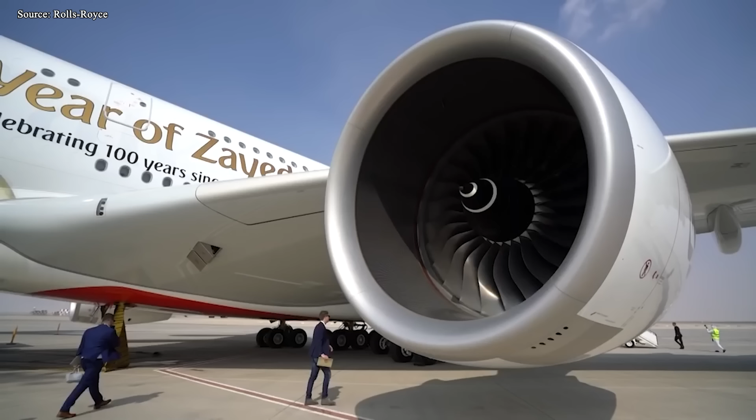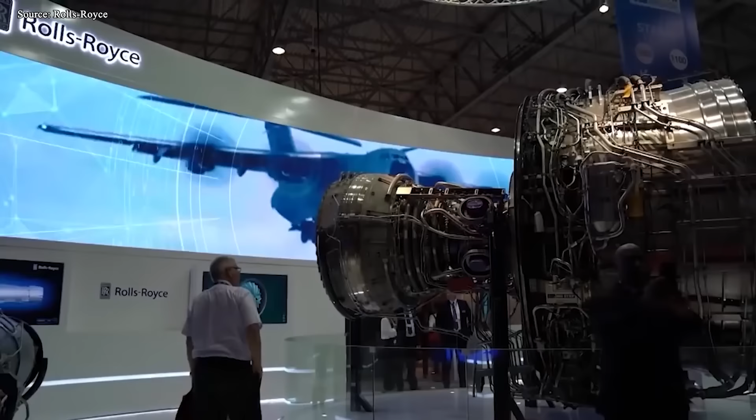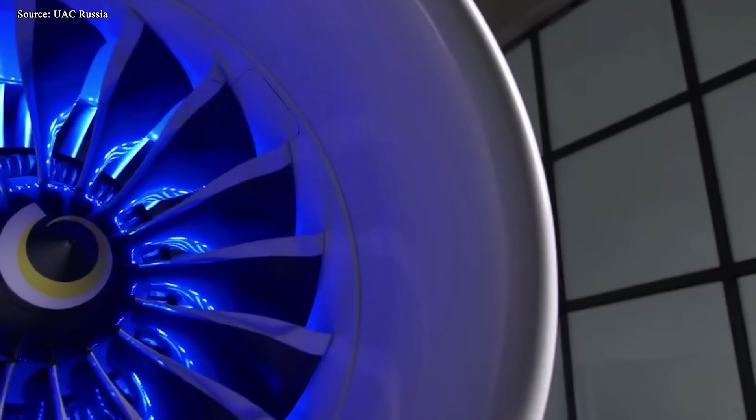In aviation, the engine isn't just another subsystem. It's the single biggest bottleneck that decides whether an aircraft flies, when it enters service, and if it ever gets certified. After Western sanctions cut Russia off from GE, Rolls-Royce, and Safran, engine dependence became a strategic vulnerability. In that context, PD-35 isn't just a new engine. It's a platform meant to unlock wide-body aviation at home. So why does it matter so much?

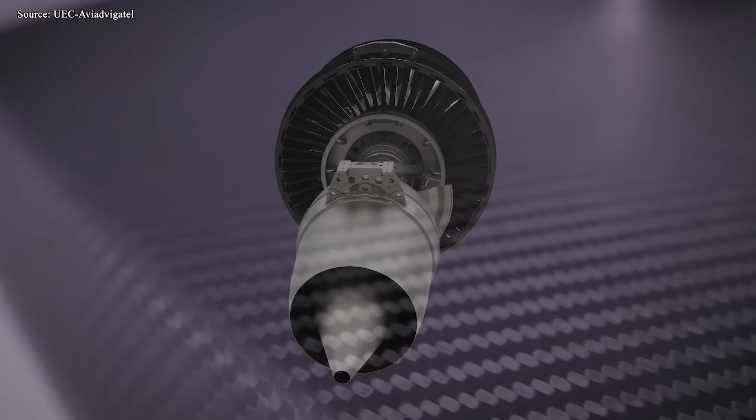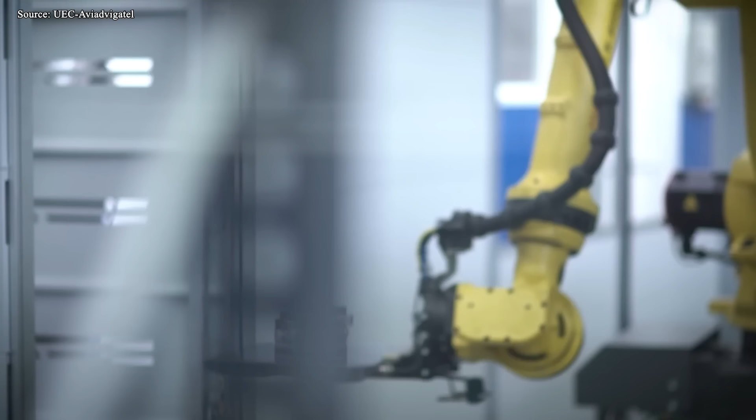And how could an engine platform reshape Russia's aviation future? Let's discover. If you want to understand PD-35, the first thing you have to forget is the idea of an engine as a one-off product. It was never meant to be a standalone power plant built for a single airplane.

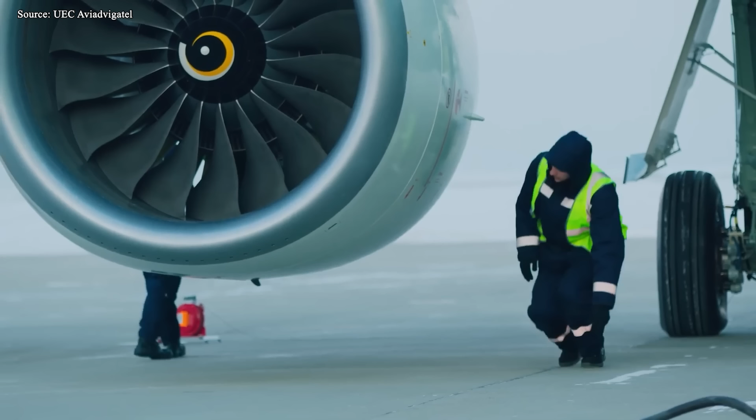It was conceived as a technology platform, and that distinction changes everything. The program is led by United Engine Corporation, and its roots go directly back to PD-14, the engine developed for the MC-21. That matters because this engine is not a clean-sheet fantasy or a political announcement disguised as engineering. It is an expansion of a core that already exists, already runs, and has already forced Russia to solve real problems in materials, cooling, and digital control.

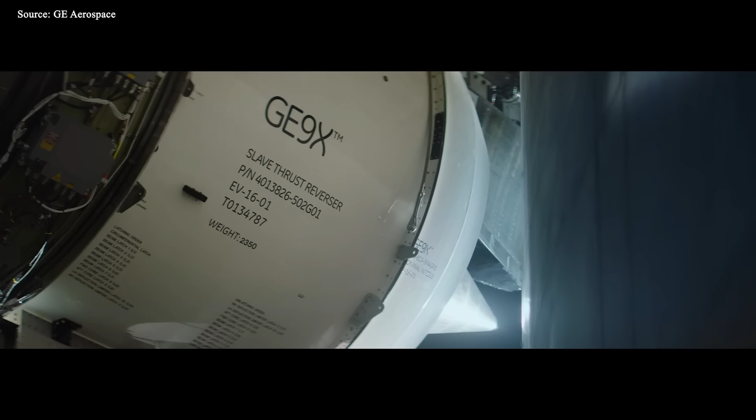This is how serious engine families are built in the real world. In commercial aviation, no country sustains wide-body aircraft programs by designing a new engine every time. GE didn't reinvent itself for each airplane. The GE90 led to GEnx, which informed later derivatives. Rolls-Royce didn't build isolated engines either. The Trent family is a modular ecosystem scaled, tuned, and adapted across decades.

That's the industry logic PD-35 is following. The goal isn't to win on headline performance. The goal is to establish a reusable high-thrust core that can support multiple wide-body aircraft over a long industrial timeline. This is why the engine exists at all. Without a domestic engine platform in the 30 to 35-ton thrust class, wide-body aviation simply cannot exist as a sovereign capability. You can design airframes, you can build wings, you can even assemble prototypes. But without an engine family you control, every wide-body program becomes fragile, temporary, and politically exposed.

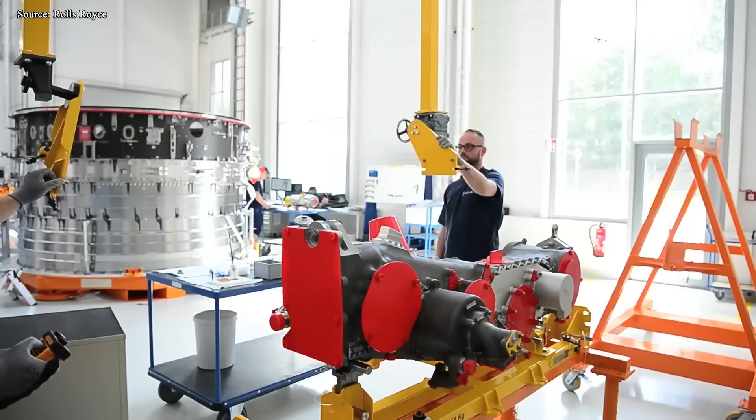That's not theory, that's history. After sanctions, Russia lost access not just to Western engines, but to updates, spares, and certification pathways. Engine dependence stopped being a commercial inconvenience and became a structural risk. It is meant to remove that risk by creating a foundation, not a single solution.

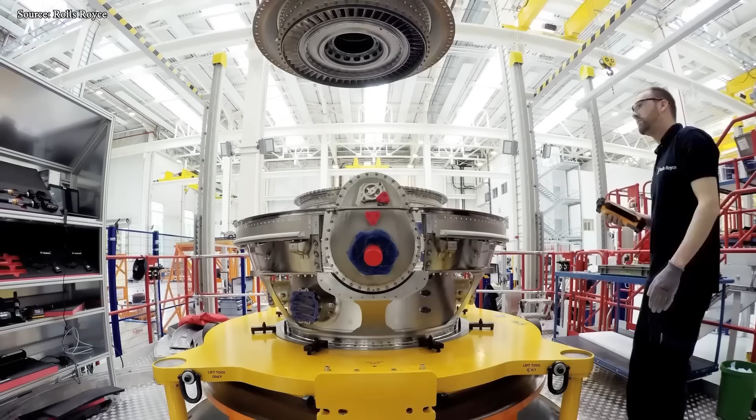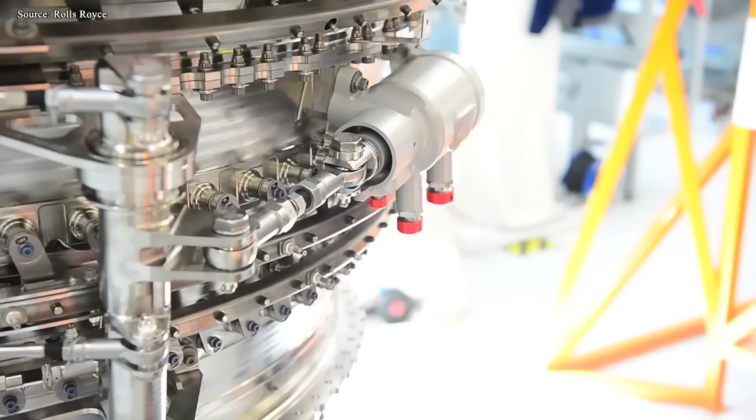The platform is designed to generate a family of large turbofans adaptable to different aircraft weights, missions, and ranges. This opens the door to twin-engine widebodies, where four-engine layouts once dominated. Not because it's trendy, but because economics and fuel efficiency demand it. More importantly, it allows future aircraft programs to be defined around an existing propulsion ecosystem rather than waiting for an engine that may never arrive.

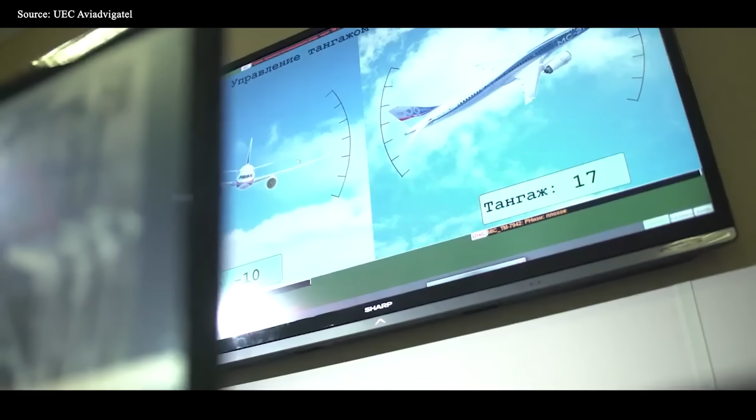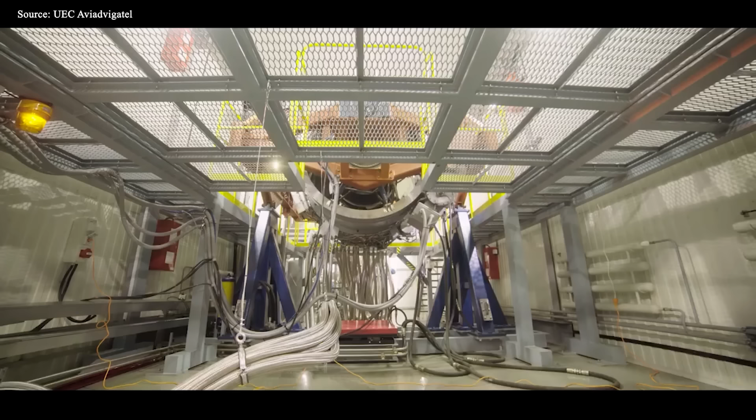The PD-14 connection is what keeps this grounded. PD-35 builds on the same design philosophy, the same digital control concepts, and much of the same manufacturing logic, but scaled and reinforced for a completely different thrust class. That scaling challenge is enormous, and no one in the industry underestimates it. But it's also the only credible way to move forward. Engine platforms are built step by step, not declared into existence.

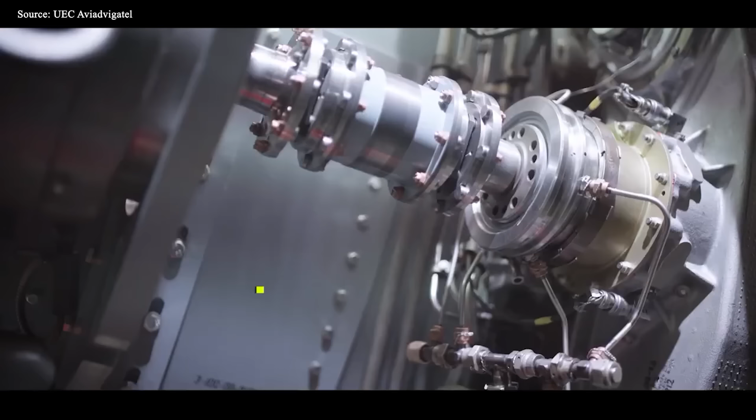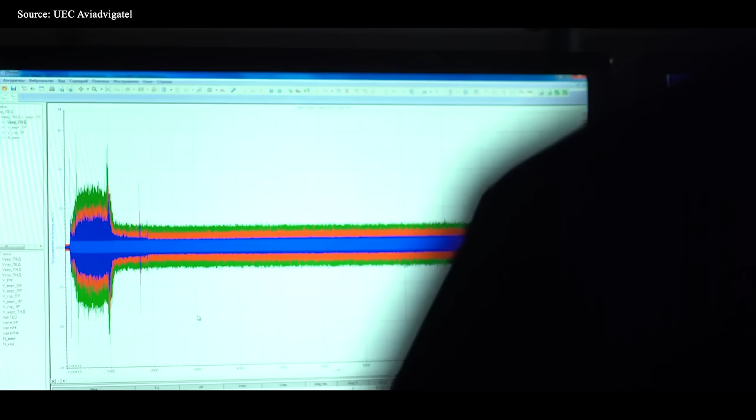This is why it should be viewed less as a product announcement and more as an industrial pivot. It signals a shift from aircraft-first thinking to ecosystem-first thinking, from designing airplanes and hoping engines follow to building a propulsion backbone that future aircraft can rely on. If Russia wants wide-body aviation that survives beyond prototypes and politics, this is the only path that makes sense. And that's what makes this engine more than just another engine program.

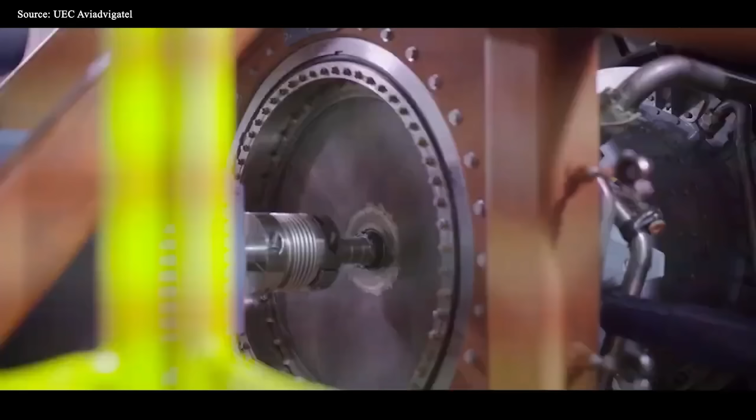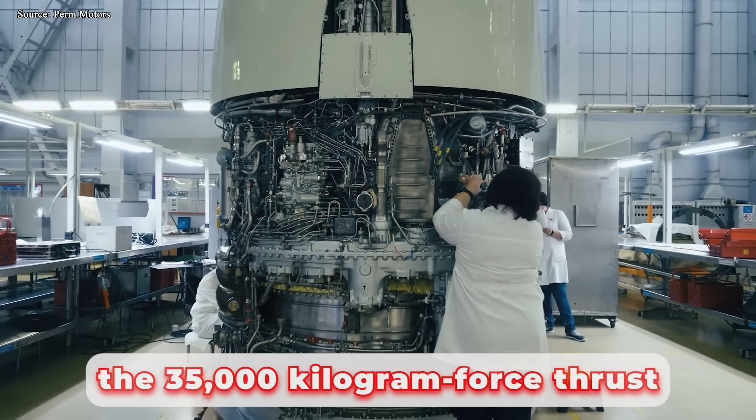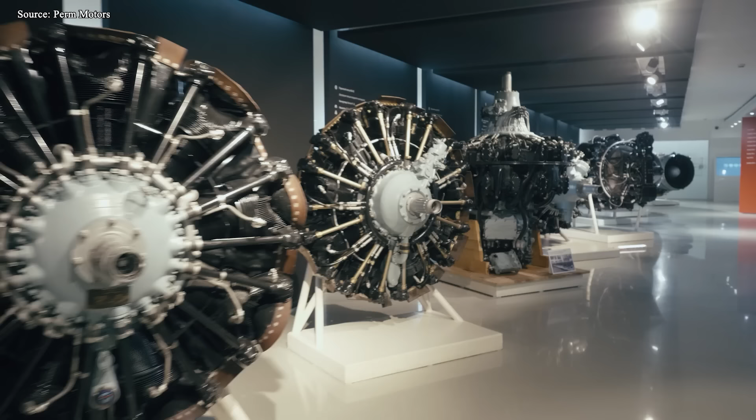If PD-35 is the platform, then the real battle happens deep inside the engine, far from spec sheets and marketing claims. This is where most engine programs quietly succeed or fail. It sits in the 35,000 kilogram-force thrust class, roughly 340 to 350 kilonewtons, placing it squarely in the wide-body twin-engine category. It is not designed to compete with ultra-high thrust engines like those on the A380 or 777-9. That choice is deliberate, because it defines the engineering philosophy: balance, not brute force.

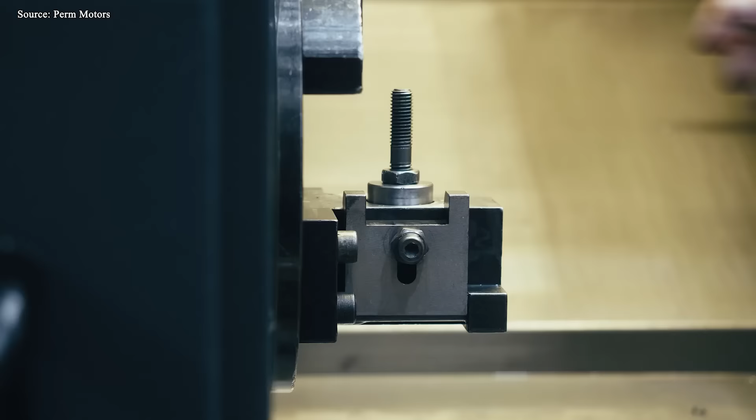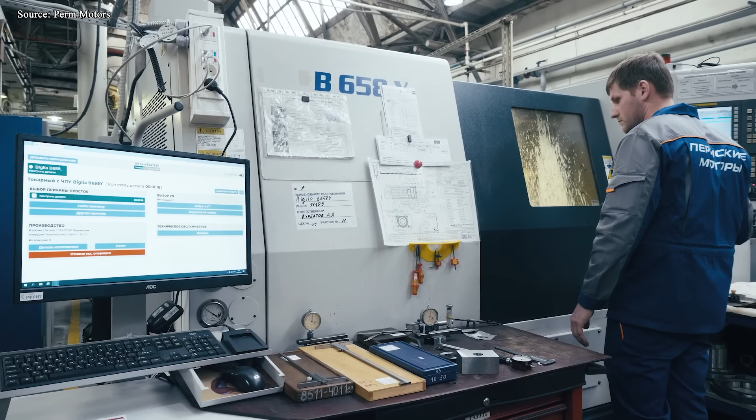At the center of the engine is its high-pressure core, where almost all technical risk lives. This core is an evolution of PD-14, expanded and pushed harder rather than redesigned from scratch. Russian engineers added an extra high-pressure compressor stage and targeted a higher overall pressure ratio. The challenge here isn't chasing a headline efficiency number. It's extracting more thermal energy from the same airflow without sacrificing durability. That balance between pressure, temperature, and lifespan is the real engine war.

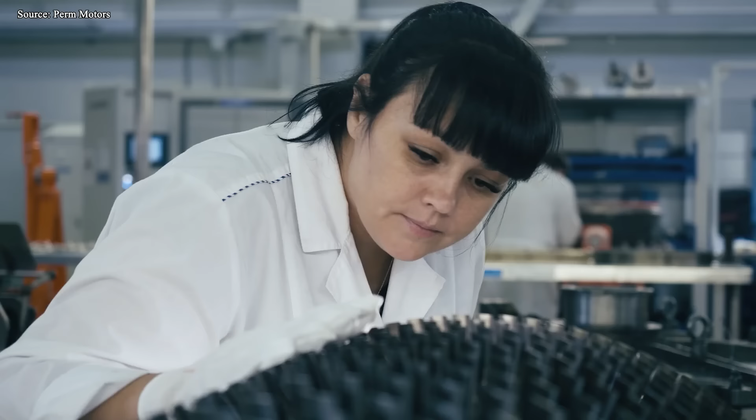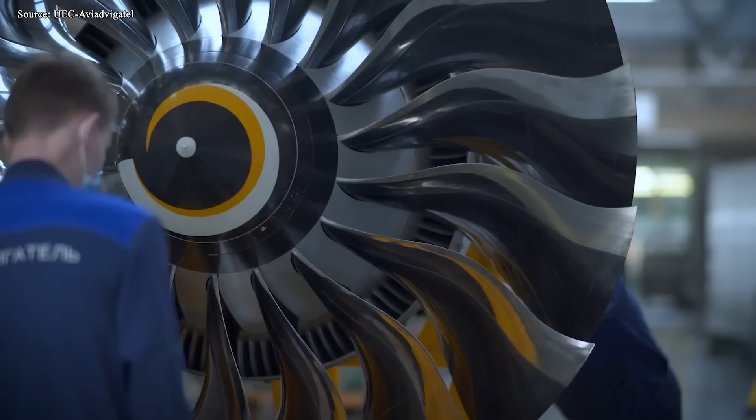Temperature is the next battleground. Modern turbofans are defined by how hot they can run before the turbine fails—pure physics, not marketing. PD-35 is designed for turbine inlet temperatures approaching 2,000 degrees Celsius, placing it firmly in the fifth-generation engine class. To survive that environment, it relies on single-crystal turbine blades and advanced internal cooling channels that route air through microscopic passages inside the metal.

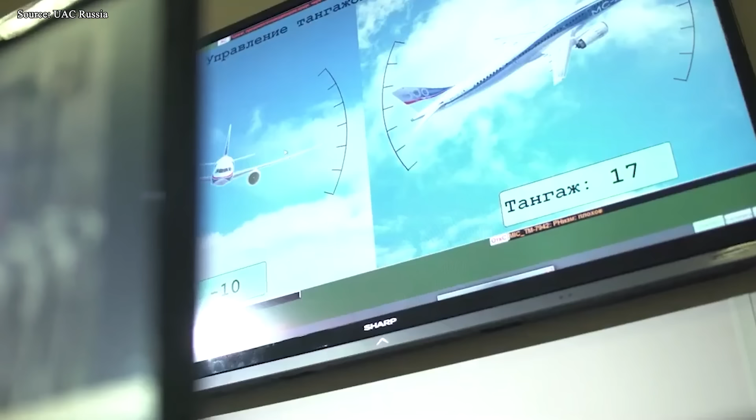These are threshold technologies. They separate modern engines from everything that came before. And this is the line most engine programs never cross—not because they lack ambition, but because physics, materials, and time don't negotiate. What often gets missed is how rare this capability actually is.

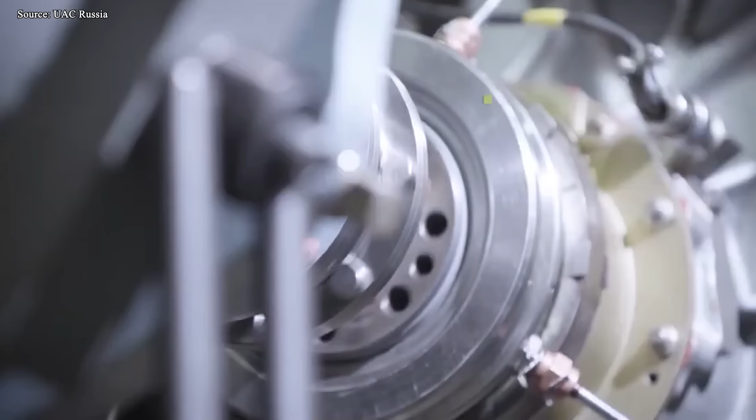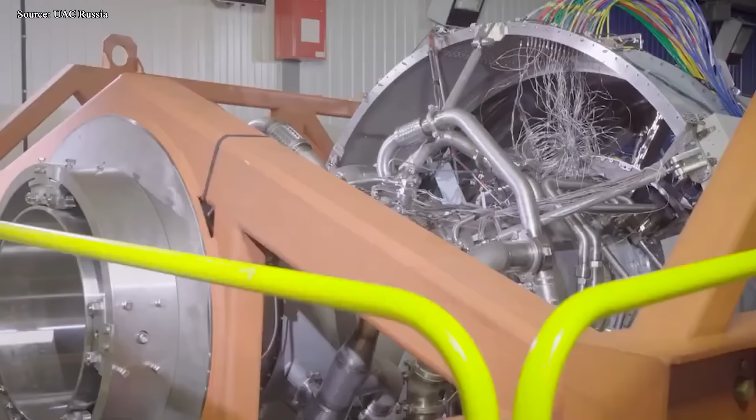Globally, only a small share of engines combine high-pressure ratios, extreme turbine temperatures, and acceptable long-term durability, roughly 15% by industry estimates. That context matters. It isn't catching up to 1990s designs. It's attempting to enter the same technical tier occupied by today's most advanced wide-body engines.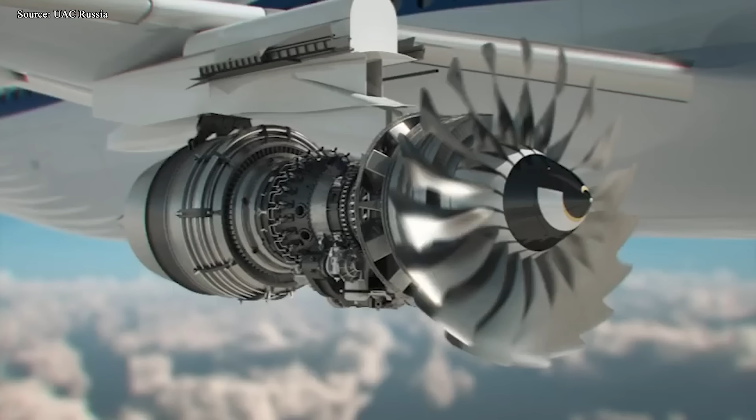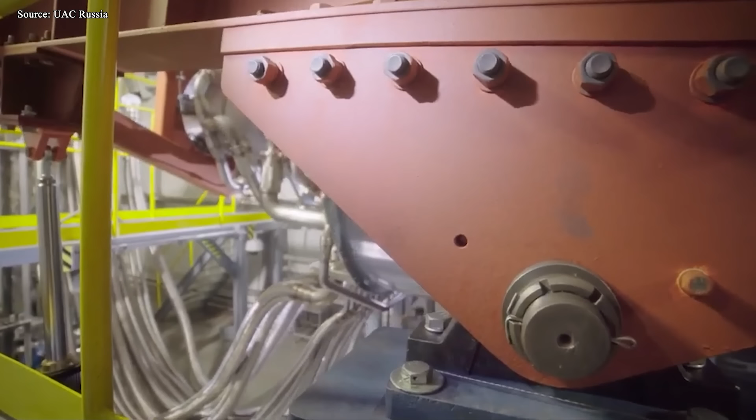The fan system reflects the same restraint. With a fan diameter of roughly 3 meters, it prioritizes bypass efficiency and noise control over headline thrust. Its length and mass are sized to integrate into modern twin-engine widebodies without forcing radical airframe compromises. This is not under-ambition, it's disciplined engineering.

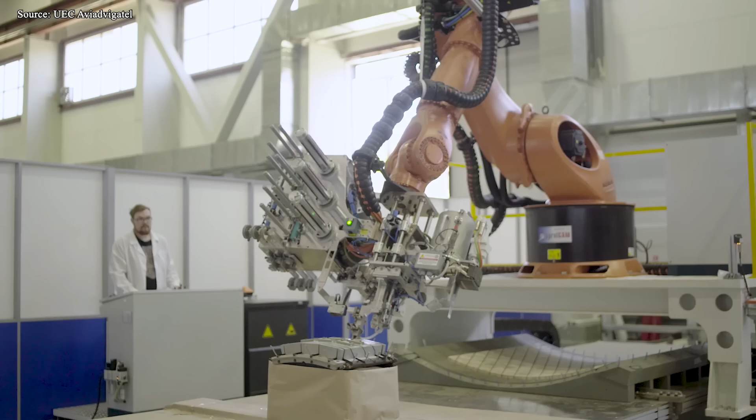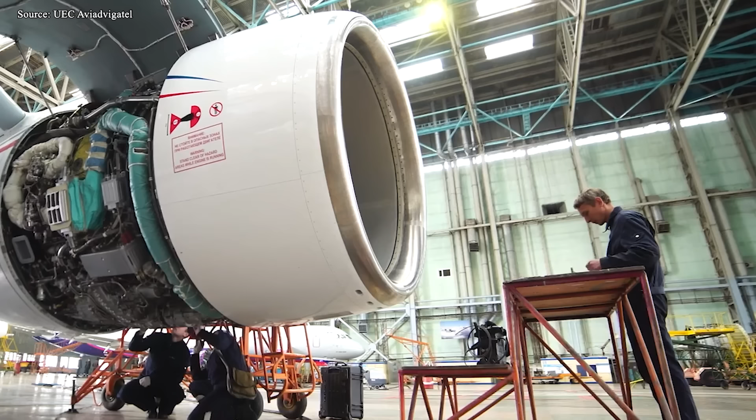Across the core design, the pattern is consistent. There are no miracle claims, no sudden performance leaps. What it shows instead is a willingness to engage the hardest parts of engine physics, where progress is slow, expensive, and unforgiving. That's where engine programs earn credibility or lose it forever. The engine's core makes one thing clear: Russia isn't trying to shortcut the fight. They're choosing to fight the real one.

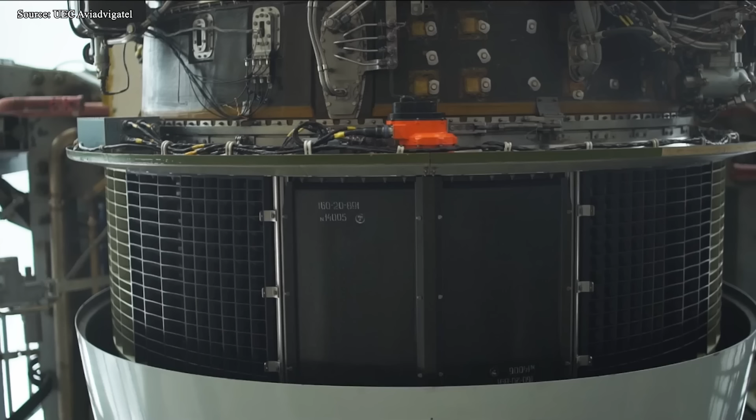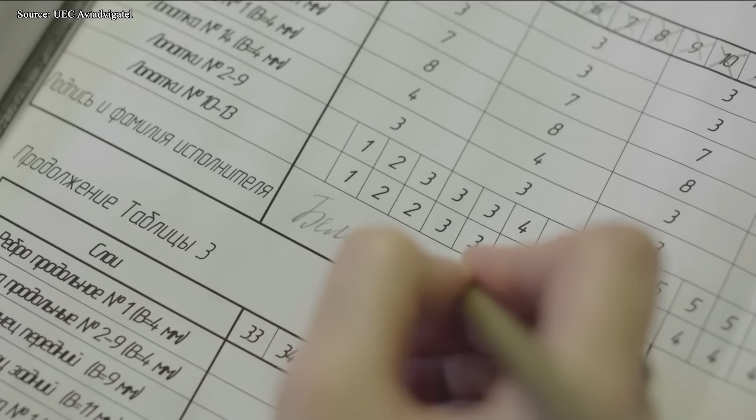The most important shift inside PD-35 has nothing to do with thrust or efficiency. It's manufacturing, and more specifically, how Russia builds engines under constraint. Not what the engine promises to deliver, but how it's actually built. Because after sanctions, the real constraint wasn't just missing components, it was missing methods.

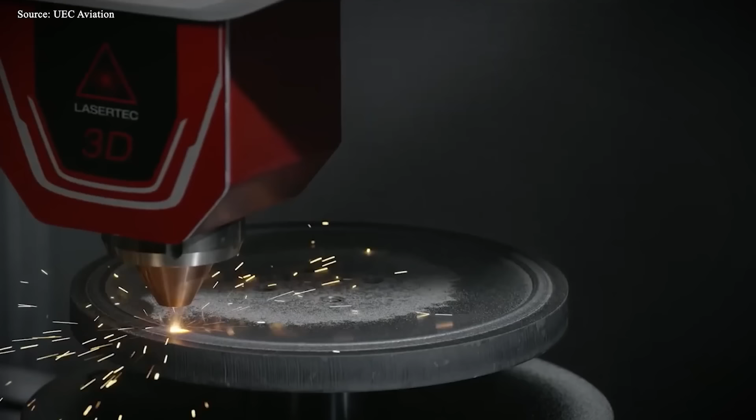Additive manufacturing sits at the center of that shift. It integrates 3D printing into critical engine parts, including low-pressure turbine elements and exhaust components. These aren't cosmetic pieces. They operate under extreme heat stress and fatigue over tens of thousands of cycles.

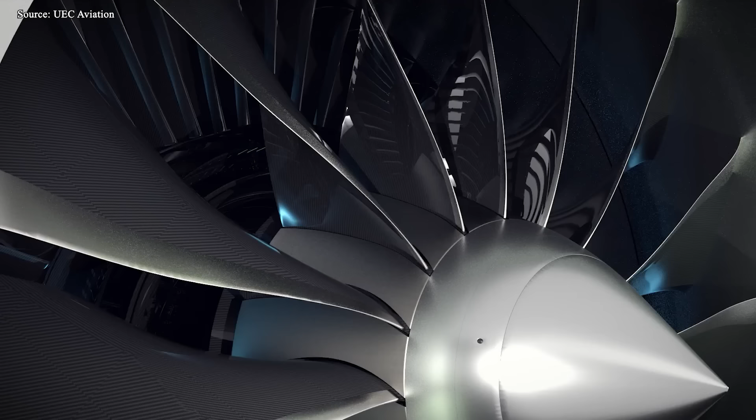What makes additive manufacturing decisive here isn't novelty, it's geometry. Traditional machining forces engineers to simplify designs around tooling limits. Additive manufacturing reverses that logic. Engineers define airflow paths, cooling channels, and load structures first, then build them layer by layer.

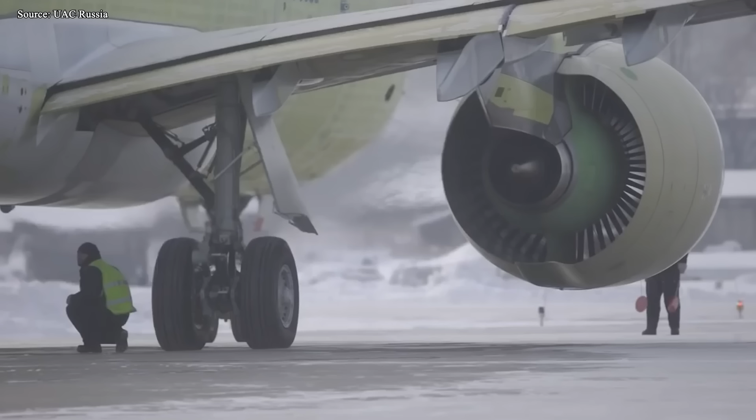That approach unlocks multiple advantages at once. Weight comes down, cooling efficiency improves, production timelines shrink, and just as importantly, dependence on foreign tooling ecosystems drops sharply. Once a design is validated, production becomes largely software-driven. That's a structural increase in industrial resilience, not a marginal efficiency tweak.

Composite fan blades tell a similar story. The engine moves away from all-metal fan technology toward polymer composite blades reinforced with carbon fiber. The result is roughly a 30% reduction in blade weight, lowering rotational inertia, and improving fuel burn and throttle response. It also reduces stress on hubs and bearings.

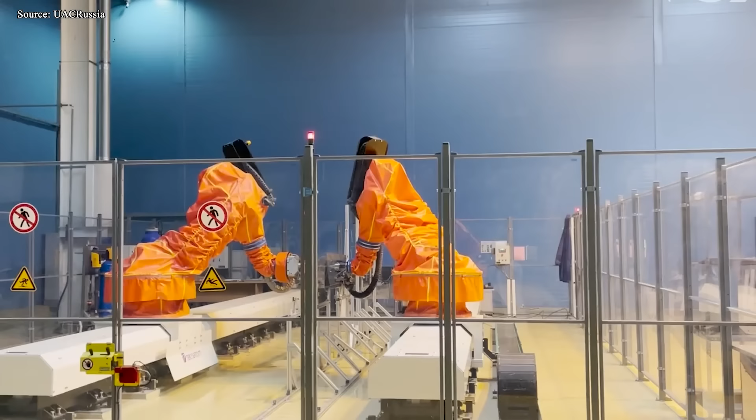But the bigger shift is industrial. This requires large-scale composite manufacturing, a capability Russia historically lacked in civil aero engines. It forces that capability into the domestic supply chain.

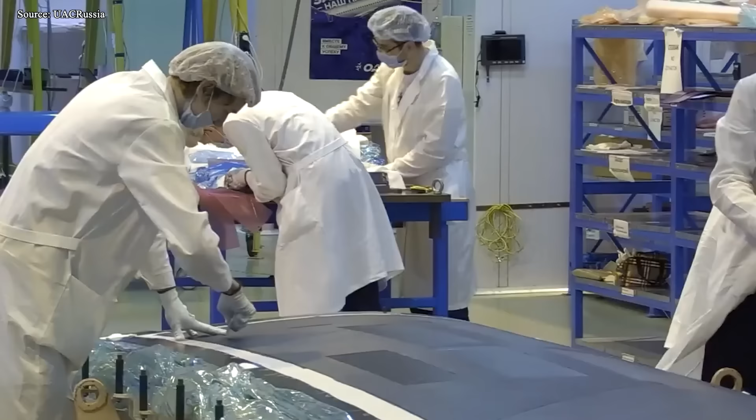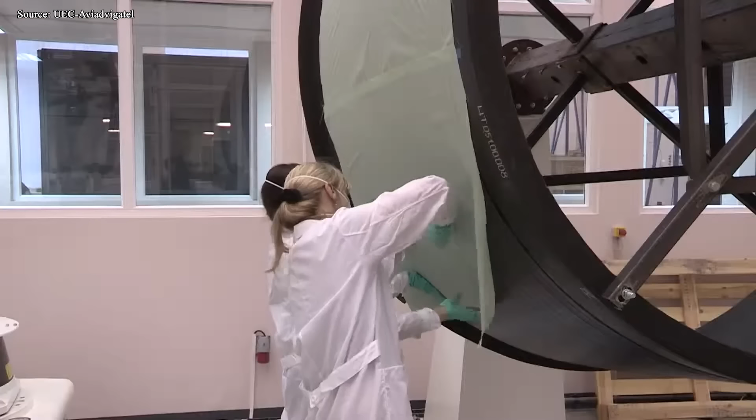Taken together, these changes point to something deeper. Engine manufacturing is moving away from heavy metallurgy-first thinking toward digital production, modular architectures, and data-driven iteration. Components are no longer optimized in isolation. They're designed as part of a system that can evolve.

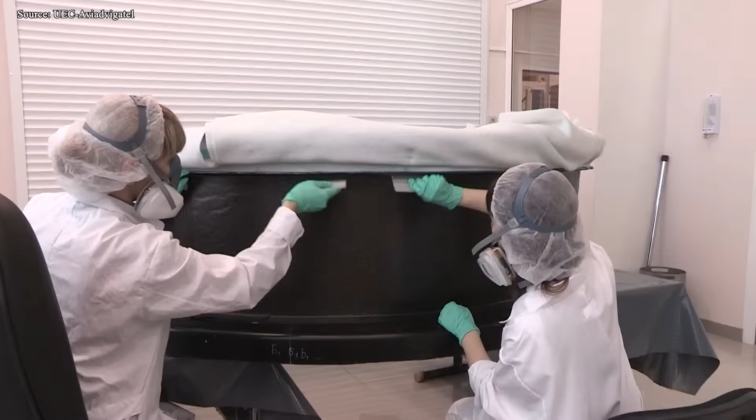That's why PD-35 isn't just a new engine. It represents a reset in how engines are designed, built, and sustained. And that manufacturing shift, not headline performance, is what truly makes it matter.

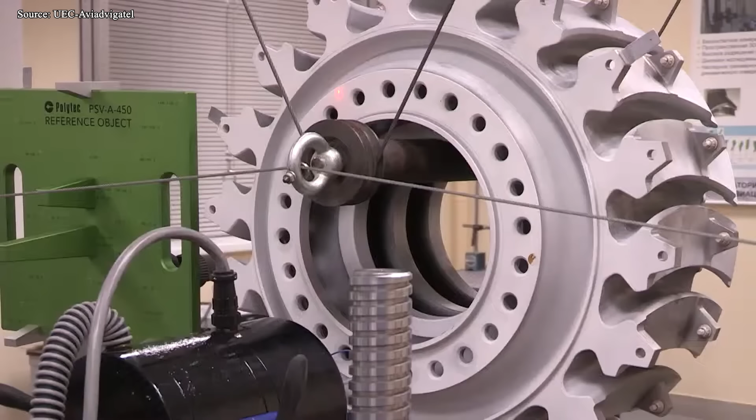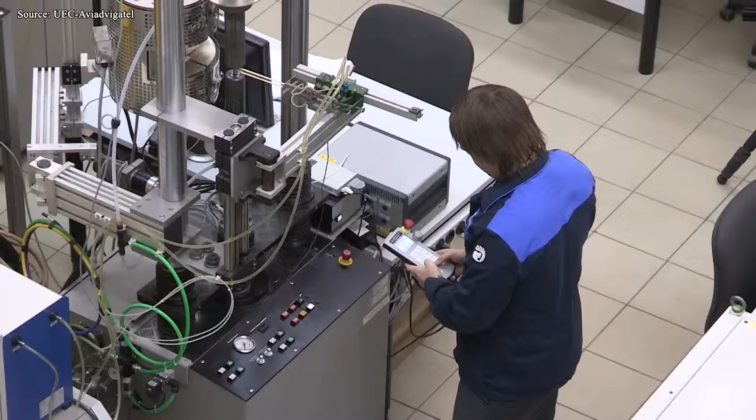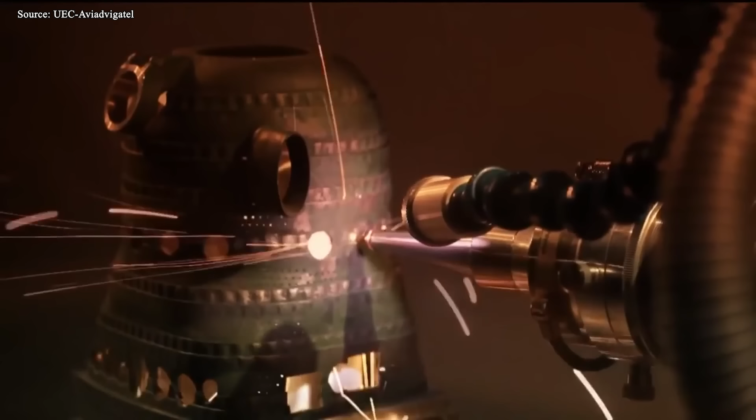PD-35's real impact only becomes clear when we separate what it actually changes from what it deliberately does not. Because this program isn't trying to win every battle in global aviation. It's trying to unlock one very specific capability Russia has lacked for decades.

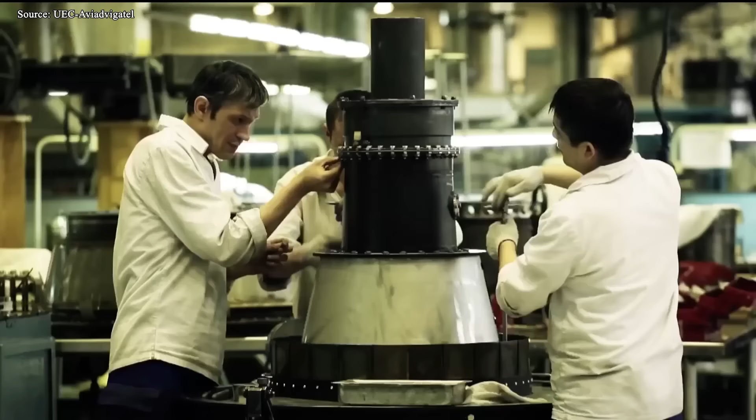What it does change is structural. For the first time, Russia has a credible path toward a domestically powered wide-body twin-engine aircraft. That alone reshapes internal design logic.

Four-engine layouts like the legacy IL-96 were never about preference. They were about necessity. The engine enables a move away from redundancy for survival toward efficiency by design. That opens the door to more competitive fuel burn, lower maintenance complexity, and realistic long-haul operations inside Russia's own network.

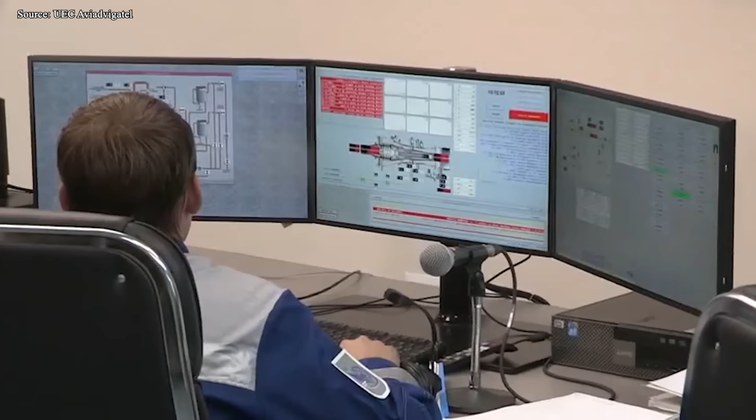It also creates an engine foundation that can support future wide-body projects, including portions of CR929, without being hostage to external suppliers. Just as important, PD-35 changes timelines thinking.

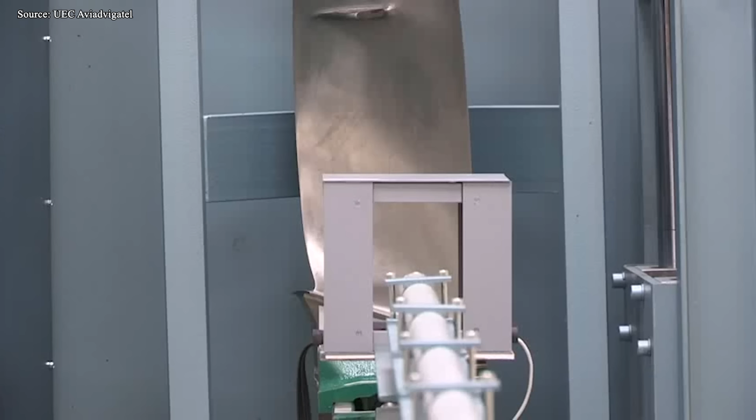This isn't a stopgap engine meant to plug a short-term hole. It's a long-horizon investment in propulsion capability, materials, manufacturing, testing, certification that compounds over decades. Engine programs don't pay off quickly. They pay off persistently. What it does not change is the global balance of power.

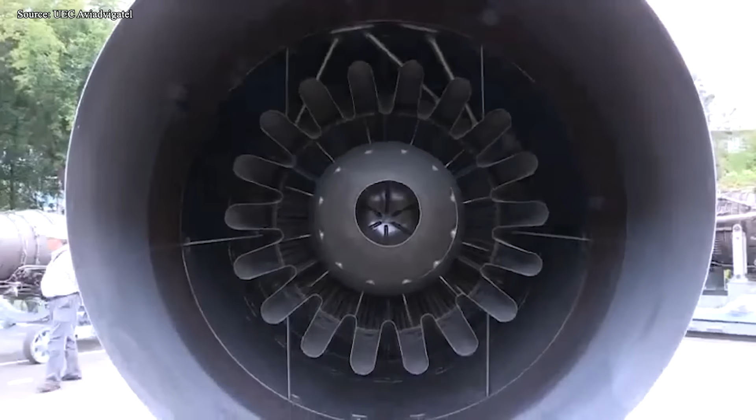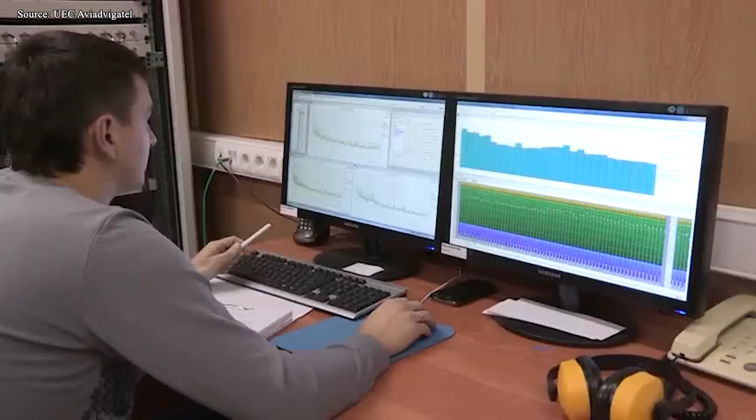It is not designed to outperform GE or Rolls-Royce in open market competition. It is not optimized for ultra-long-range Western wide-bodies. It is not being positioned as a mass export product. This is a strategic engine, not a commercial challenger. That distinction matters because it defines success correctly.

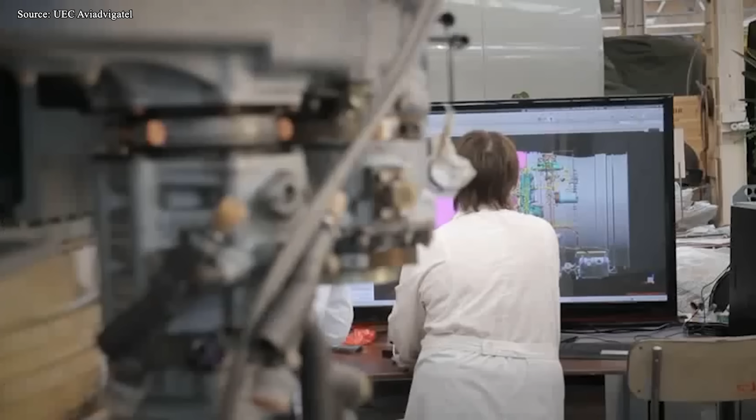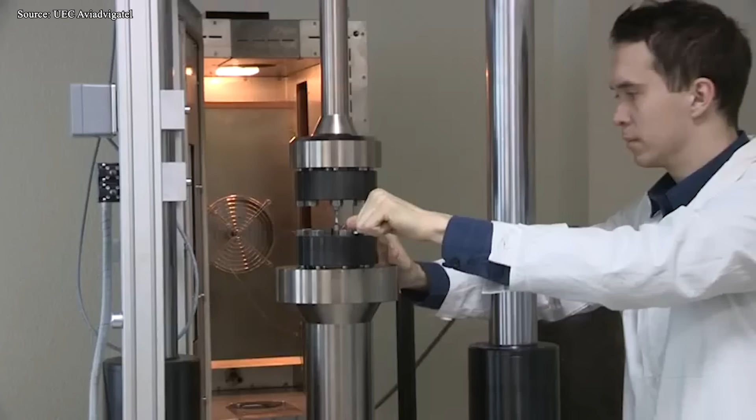The timeline reinforces that reality. Original production targets around 2028 have shifted closer to 2030, largely due to prioritization of PD-14 and PD-8. That isn't a collapse. It's resource allocation. Engine development at this scale is brutally sequential. You don't rush the core.

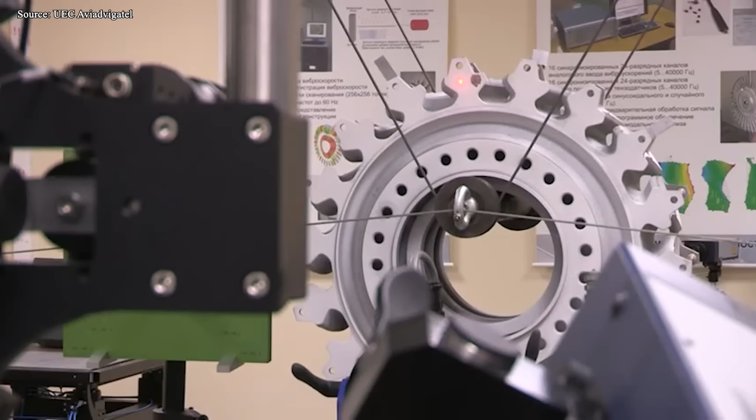In the end, PD-35 doesn't rewrite aviation overnight. What it does is far more consequential. It redraws the boundary of what Russia can build independently. And in an industry where engines define freedom of design, that boundary is where the future starts.